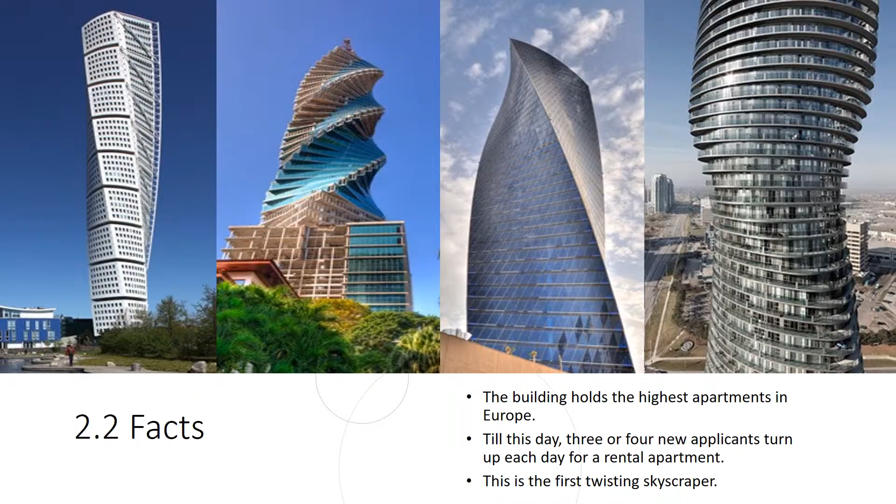The building is located in the western harbor of Malmö, beside the Ribersborg beach, just across the connecting bridge between Sweden and Denmark. On a clear day, the building would be visible from Copenhagen in Denmark, in the distance across the Øresund.

This inspirational project has received several prestigious awards. In 2015, it received the 10-Year Award from the Council on Tall Buildings and Urban Habitat. Moreover, the FIB 2006 Award for Outstanding Concrete Structures and the MIPIM Award, and much more.

Section number 3 is the building description. This section will cover some general information, the design and concept of the building, the material used for the construction, the facade of the building, the finishing material used in the torso, and the cost of such a mega project.

These are some general information about the building. The owner and developer is HSB, which is an association for housing in Sweden. The architect and structural engineer is the company of Santiago Calatrava, Architects and Engineers. The electromechanical engineer is the Sustainable Engineering and Design Company. The main contractor of the project is NCC, one of Sweden's top contractors. The interior designer is Samark Architecture and Design.

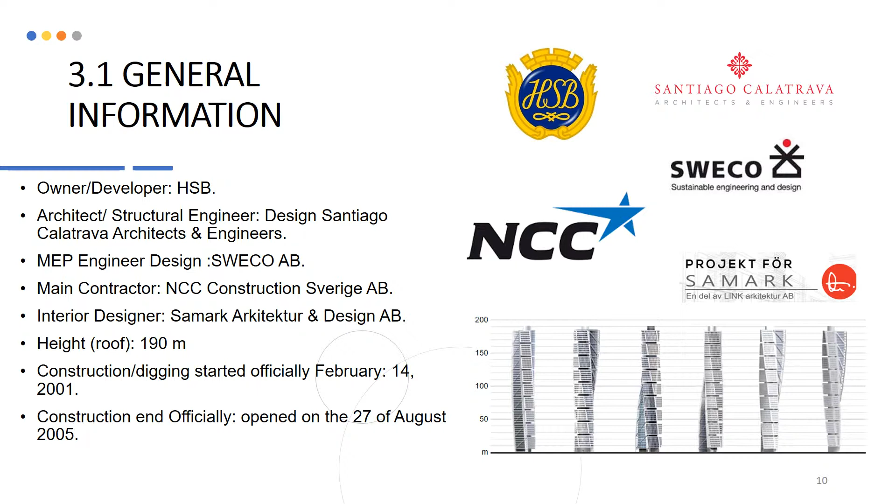The designer and mastermind behind this masterpiece is Santiago Calatrava. He is one of the most fascinating architects of our time, responsible for a number of fascinating projects all over the world, such as the City of Arts and Sciences in Valencia, the World Trade Center Transportation Hub in New York City, and the Olympic Sports Complex in Athens.

The building's Spanish architect Santiago Calatrava was inspired by a white marble sculpture called Twisting Torso that explores the human body in motion, as it can twist as far as it can while staying directly upright. This sculpture is in fact his own piece of art.

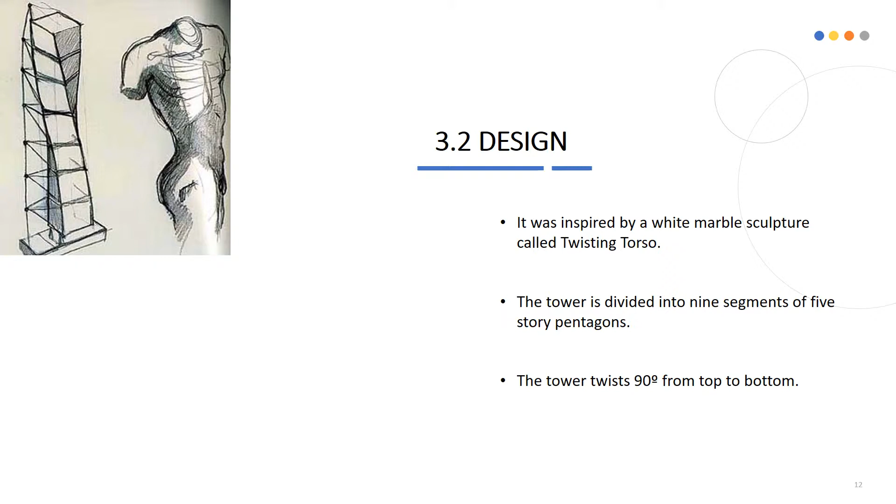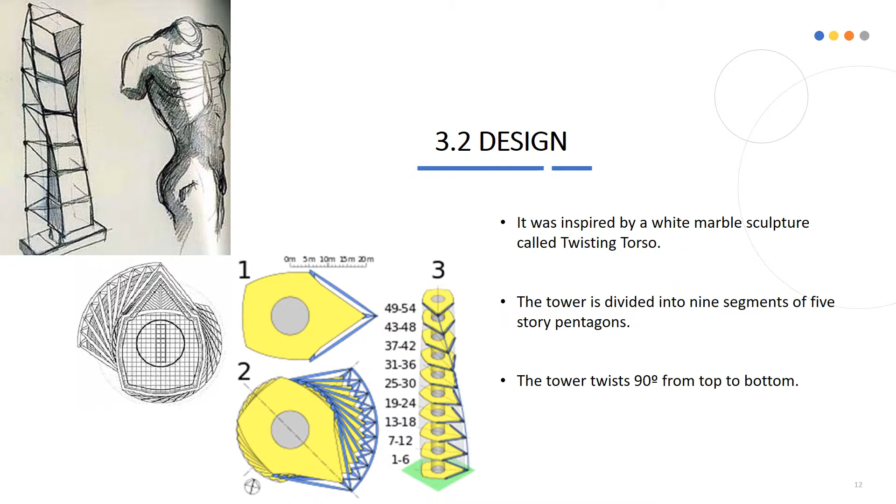The tower is divided into 9 segments of 5-story pentagons that are stacked one above the other, with one floor recessed between every two adjacent cubes. The topmost segment has an angle of 90 degrees clockwise compared to the ground floor. In other words, the tower twists 90 degrees from top to bottom, and that's why it was named the Turning Torso. The building is situated in the middle of a black granite reflecting pool with two sculptures also designed by Calatrava.

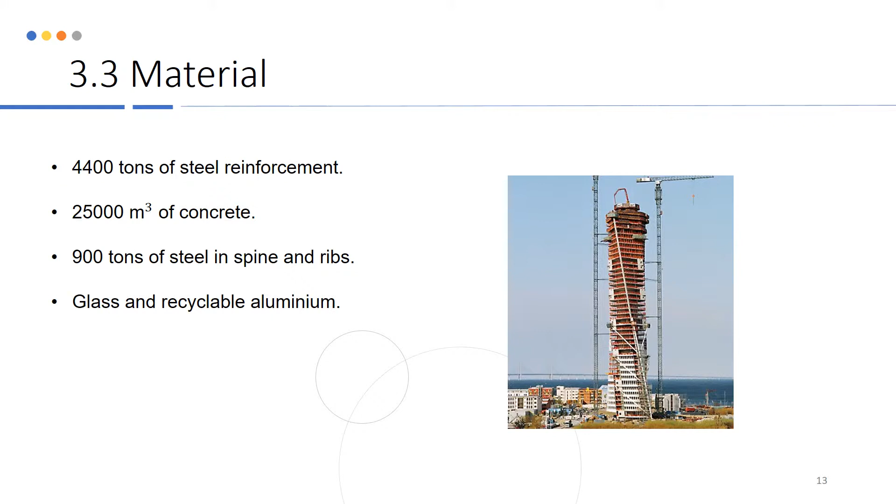During construction, 4,400 tons of steel reinforcement were used. Moreover, 25,000 cubic meters of concrete, 900 metric tons of steel in the spine and ribs, and glass and recyclable aluminum for the facade. Now I'm going to talk about the facade of the project.

The total facade area is 2,000 square meters. Its color is white, chosen to give it a noticeable and stunning appearance from far away. The facade system is a curtain wall made out of 2,800 curved panels and 2,250 flat windows in total. The facade uses curved aluminum panels with windows at an angle between 0 and 7 degrees, either inwards on the western facade or outwards on the eastern facade, in order to follow the twist of the building.

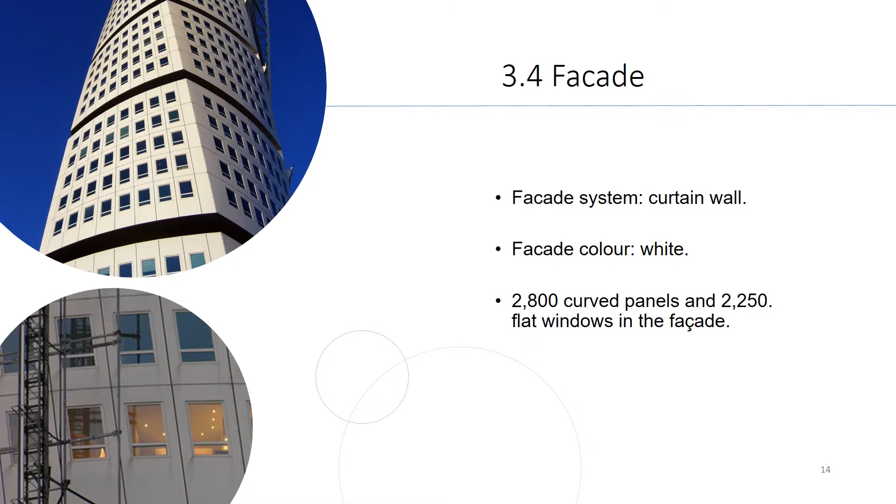Not everybody knows that there are quite a few windows broken every year. When the torso sways, it stresses the glass in the windows, and some of them can't handle the movement, so they crack and get broken.

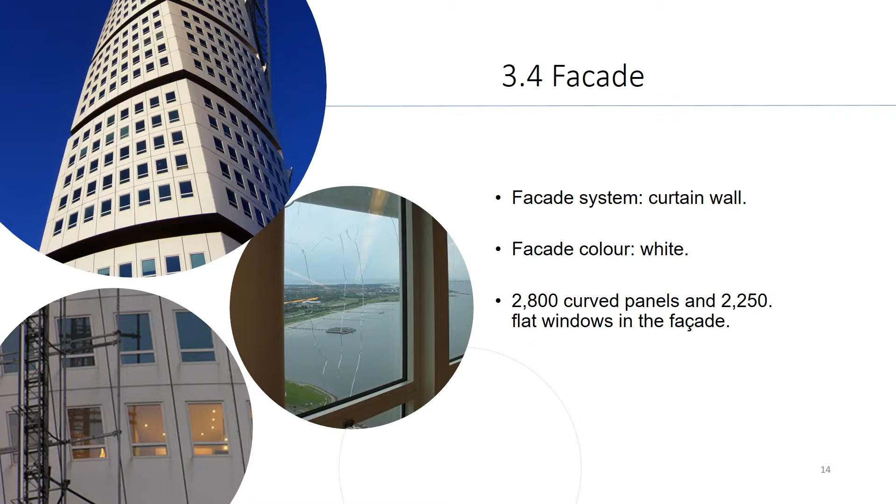The torso is furnished to a high and modern specification. Entrance halls feature polished limestone floors, and the same stone is also used on window sills.

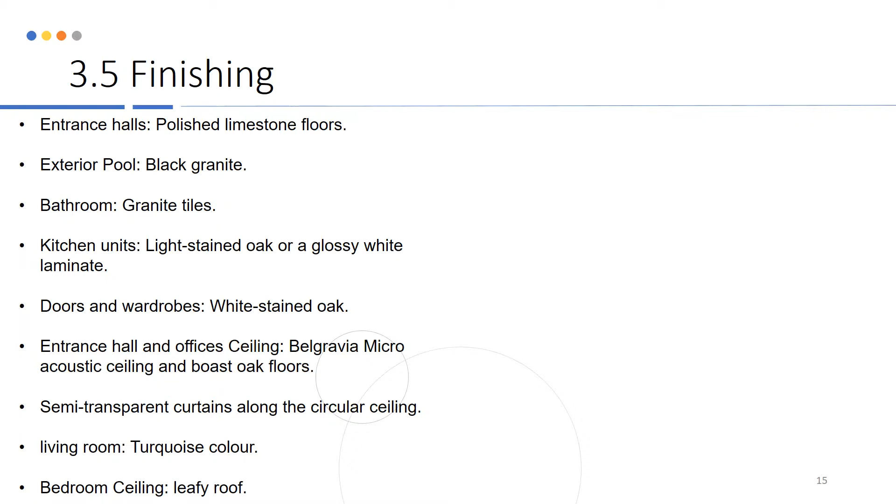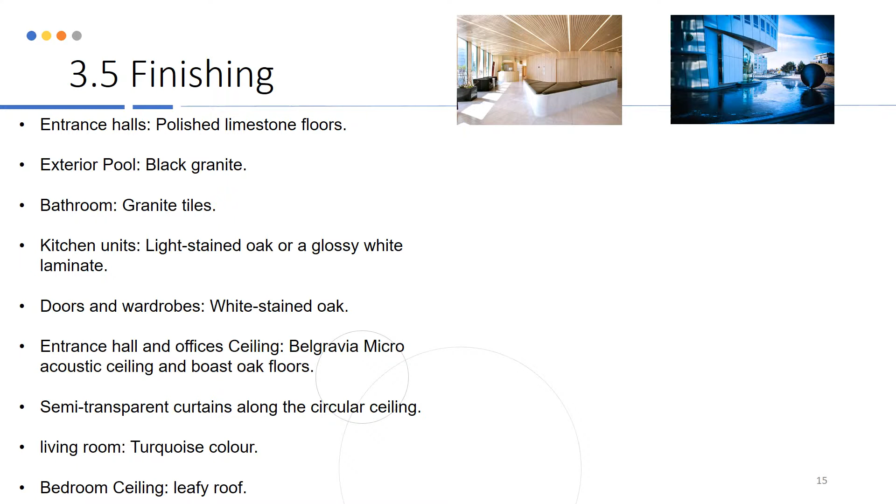The exterior of the Turning Torso features a black granite reflecting pool and a granite entrance path. Granite is also used in some places within the building, notably in the lobby. Tiled bathrooms are fitted with granite surfaces and underfloor heating.

The kitchen units are specially designed from light stained oak or glossy white laminate to accompany the kitchen appliances, such as the white washing machines. The apartment doors and wardrobes are made of white stained oak as well.

Customized corridor micro-acoustic ceilings are installed for the spiral-shaped corridors leading from the entrance hall to the car park, as well as the offices in the building. Every single ceiling tile used in the corridor was custom made in order to follow the curving movement of the corridor.

Semi-transparent curtains along the circular ceiling serve to create a room within a room. The carpet used also takes up the circular form.

A turquoise color with shimmer effect has been chosen for the walls of the living room. The ceiling of the bedroom is a leafy roof in silver that gives a metallic effect.

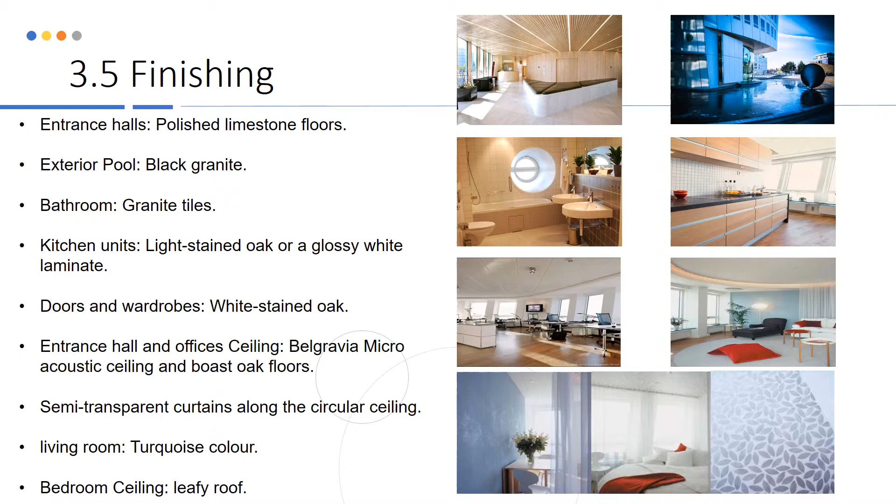The architect Santiago Calatrava made a mistake and calculated the wrong amount of reinforcing iron to use. 44,000 tons of reinforcing iron were used instead of what was planned, 1,850 tons. This means a huge increase in the total cost, and caused the construction time to increase by one full year.

The outside steel frame also had its cost increase due to a conflict with the supplier. The total cost was increased from the planned 80.5 million US dollars to an actual total of 286.5 million dollars, as the building turned out to be more complicated than planned.

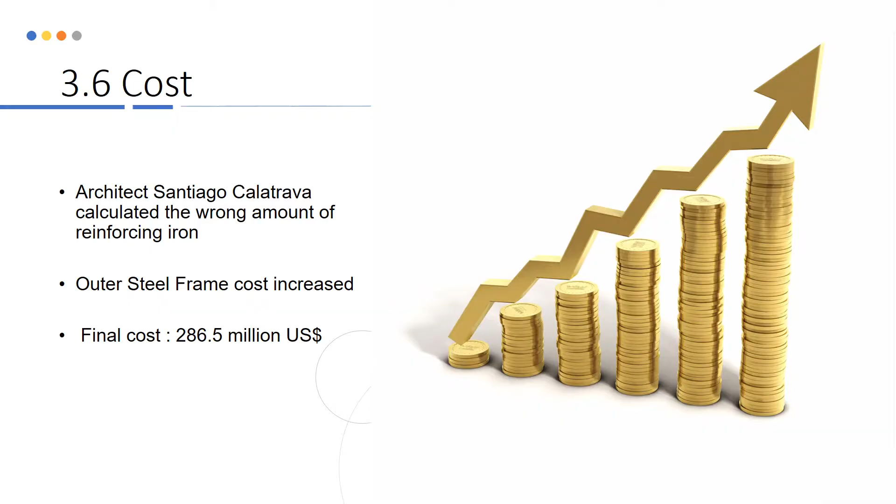Section number 4 covers the structure analysis of the building, as well as the foundation of the torso and the superstructure.

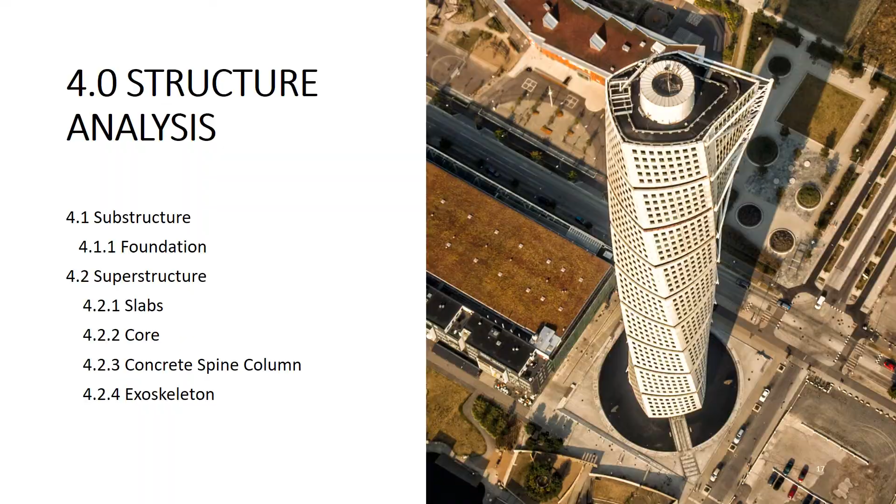The central core is supported by a foundation slab that is 30 meters in diameter and 7 meters in thickness, which was poured in 3 continuous days.

The tower rests on piles driven into a foundation that sits directly on the limestone bedrock. The piles were driven 15 meters into the ground and a further 2 meters into the limestone bedrock by an enormous vibrating sheeting machine. This type of foundation slab was used to support the building and avoid any unexpected bending or swaying.

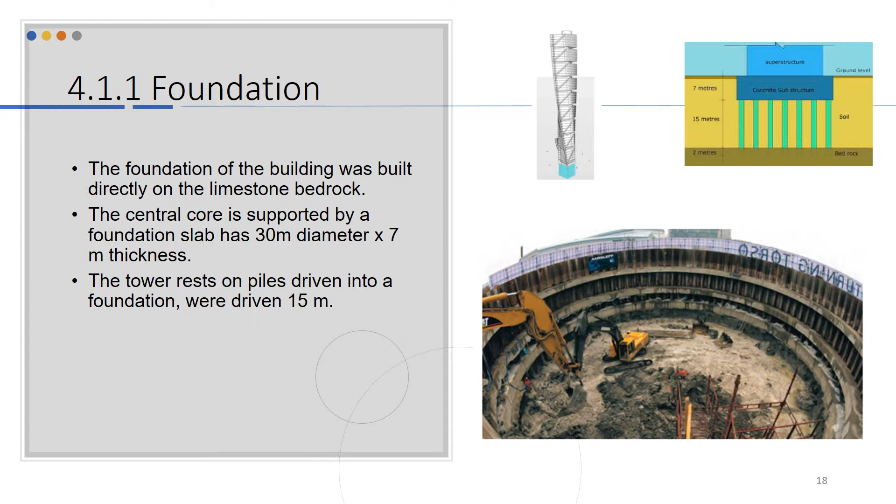Now I'm going to talk about the superstructure. First, the structural slab: slab forms are fitted around the core. The forms of the structural slab are triangular in shape and fitted together like a slice of pie to form an entire floor.

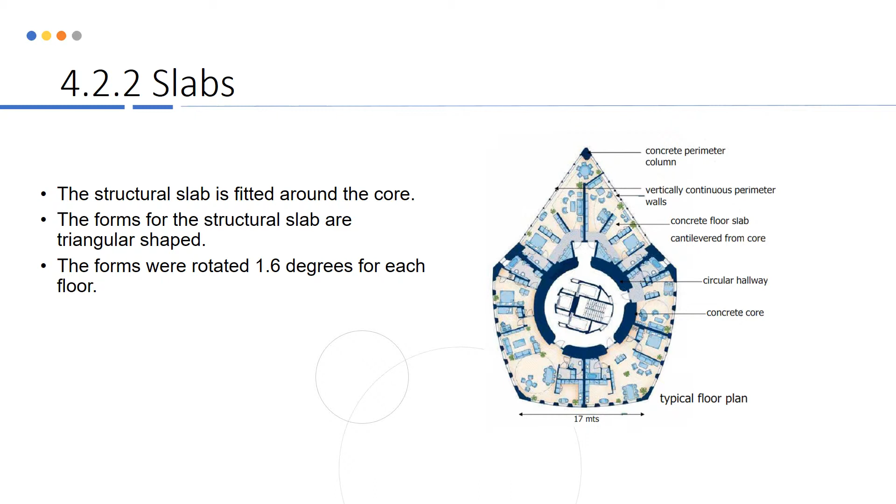The corner of each floor is a concrete column supported by a pile foundation. The forms of each floor rotate 1.6 degrees in order to create the characteristic twist of the building.

The concrete core is the main load-bearing structure of the building, with an inner diameter of 10.6 meters and walls 2.5 meters thick on the ground floor, decreasing gradually until it reaches 0.4 meters at the highest level. The core is shaped like a concrete pipe.

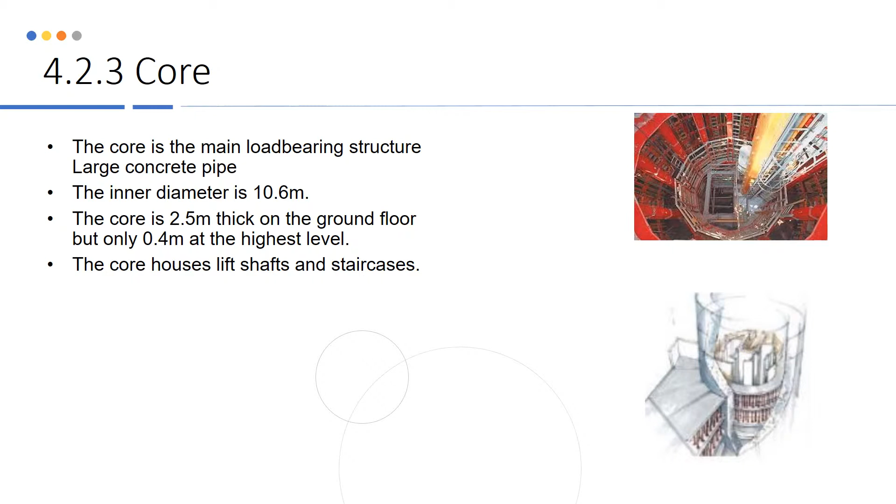The core houses the lift shafts and staircases inside of it. A circular hallway rings around the central core to provide a walkway from the lifts to each flat.

The concrete spine twists up the torso, part of the support structure that protects the 9 cubes from wind loads. The concrete spine is constructed floor by floor; every section must fit exactly with the one below it, and it's tilted slightly at a precise angle.

This picture shows the main superstructure elements of the Turning Torso.

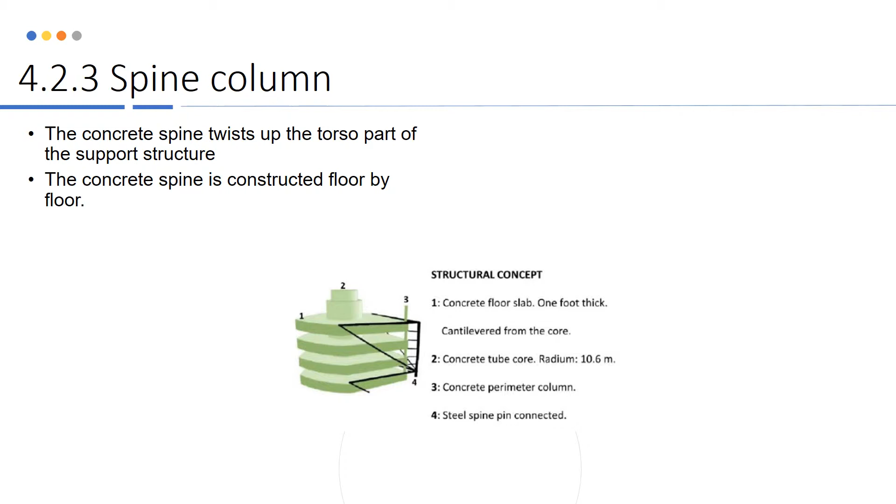The torso's exoskeleton wraps around the torso, which is effectively a white steel truss erected on the outside of the building with the same clockwise rotation as the tower itself. It is critical for the torso's support.

The exoskeleton consists of a spine column at the corner of each floor, with diameter up to 90 cm, fixed to the tower between each module, mainly with horizontal and diagonal tubes.

These tubes reach back to 4.5-ton steel anchorages embedded in shear walls at the building's back corners. The steel support transfers shear forces to the supporting concrete core.

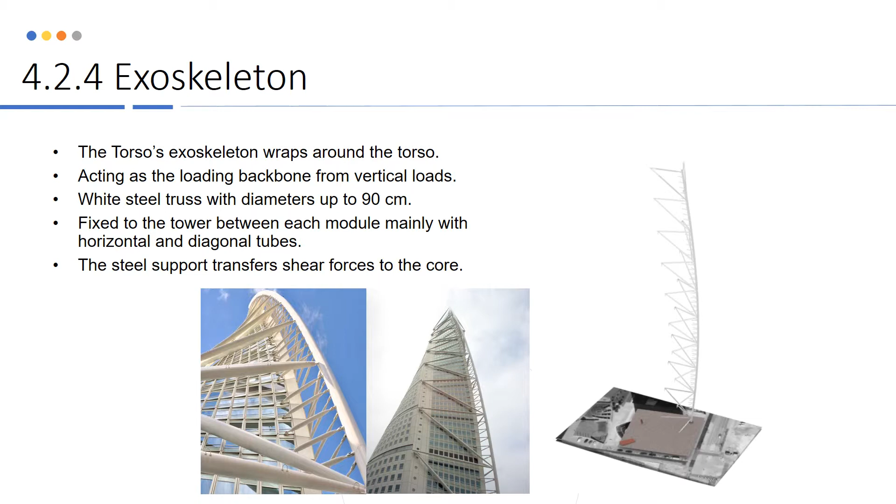As you can see from this picture, this is how the load is transferred. At picture number 1, the load transfers from the exoskeleton to the horizontal and diagonal supports, to the core, and then to the foundation.

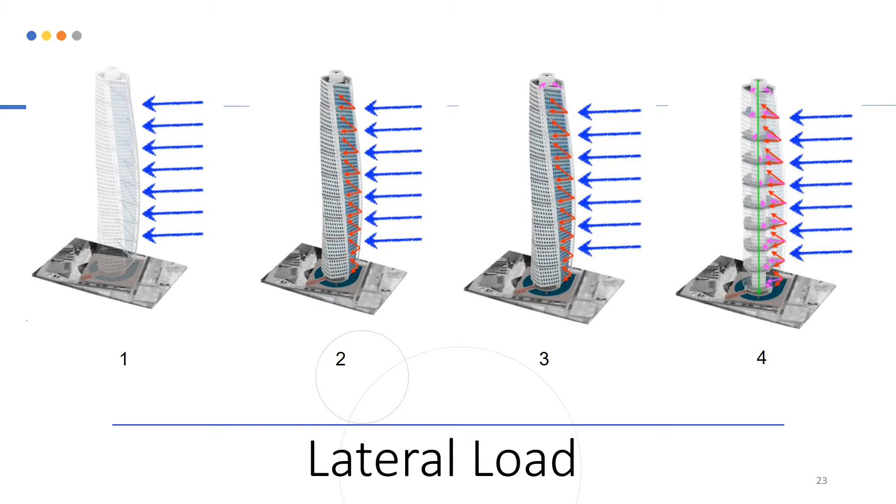Now I'm going to talk about the construction process and how it was done exactly.

During construction, the crew had to work 80 hours a week to stay on schedule and budget, as lots of days were lost due to extreme weather conditions. Wind speed was 72 km per hour, with temperatures below freezing on the top floors. The plan was to construct one floor per week.

The construction couldn't be done without the automatic climbing structure. This structure shapes the building floor by floor and is the muscle that made everything possible. It was anchored on 12 fixing points, with a concrete boom installed on its own climbing scaffold using 4 fixing points in the core. A Putzmeister device on the ground floor pumps concrete to the higher levels at a rate of 1 ton per second.

The outer floors are built using a temporary platform called the table floor. The table forms are tied to the concrete core, and the legs are screwed tight to the floor below to fix it in place. All the table form sections are connected together to provide a base for the rebars and concrete.

After the concrete dries, the automatic climbing structure moves to the upper floor. Before the table slabs are moved to be used on the next floor, they are inspected on the ground floor. This process may sound simple, but in such a massive project, it was very challenging.

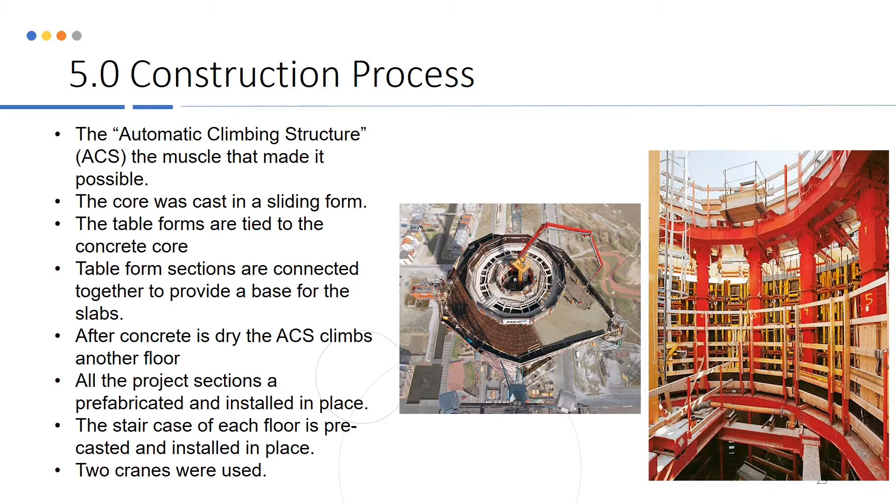All the project sections were prefabricated and installed in place. The reinforcing iron bars are made ready on the ground in a building nearby. The staircases of each floor are also precast and installed in place, working from the top opening down to the bottom. 2 cranes were used to move the table forms for maintenance and construction.

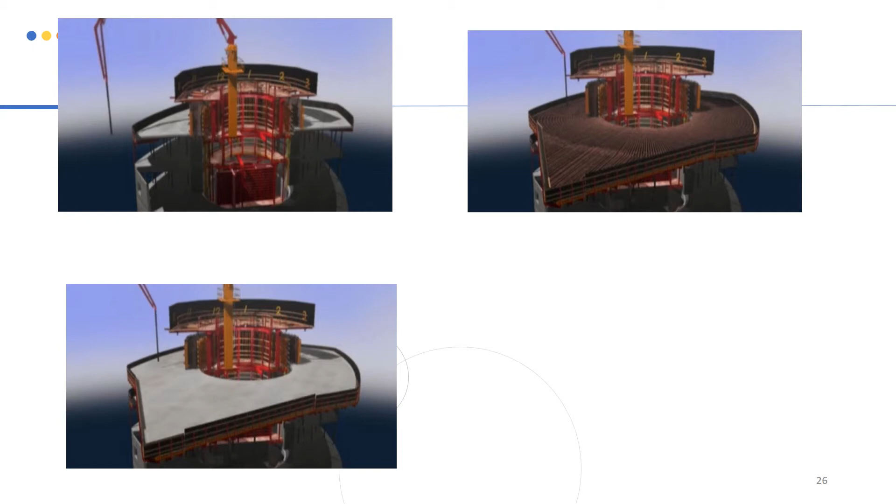The construction process was done as follows: first, the table forms are added, and when completed, the rebars are installed in place. Then the concrete is poured. After pouring and drying, the automatic climbing structure climbs to the next floor to continue the same process. Floor by floor, this is done until the whole building was constructed.

The final section of the presentation is the function of the building. This section covers the uses of the building, the services it provides, its sustainability, and finally safety. The main usage of the torso is for rental apartments and conference offices.

It houses top quality apartments, offices, and conference rooms. It consists of 147 rental apartments on floors 14 to 50, ranging from one-bedroom 45 square meter units to 190 square meter units. Not all apartments are equal in dimension because the floor space changes due to the size of the core walls, so the ground floor has 370 square meters of usable space while the top floor has 430 square meters.

All apartments have unique layouts depending on their position in the building. The living rooms are large and open, often with views in two directions. On the seventh floor there's a room for celebrations that can take up to 50 guests for dinners. There's a gym, sauna, and jacuzzi on the 43rd floor. Each apartment has its own space in the wine cellar, and close by there's a cozy little room for wine tasting. The 53rd and 54th floors, with a magnificent 360-degree view, have conference halls.

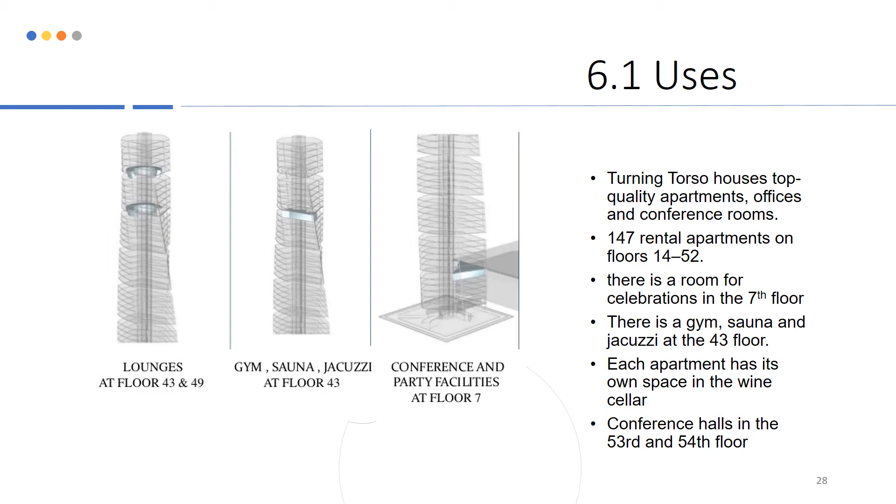The torso offers a wide range of services. There are 5 high-speed lifts in the core of the building, traveling at 5 meters per second, taking only 58 seconds to go from ground level to the 54th floor. 3 of those lifts serve the residential apartments, while 2 serve the commercial areas. A separate parking block for residential and business tenants can be accessed by a private tunnel. The heating system is powered by a utility Sydkrafts system, with 100% locally renewable sources. The 2 lower cubes of the torso contain offices and conference rooms with separate heating, cooling, and IT systems. There's no extra charge for window cleaning, as it's included in the rent.

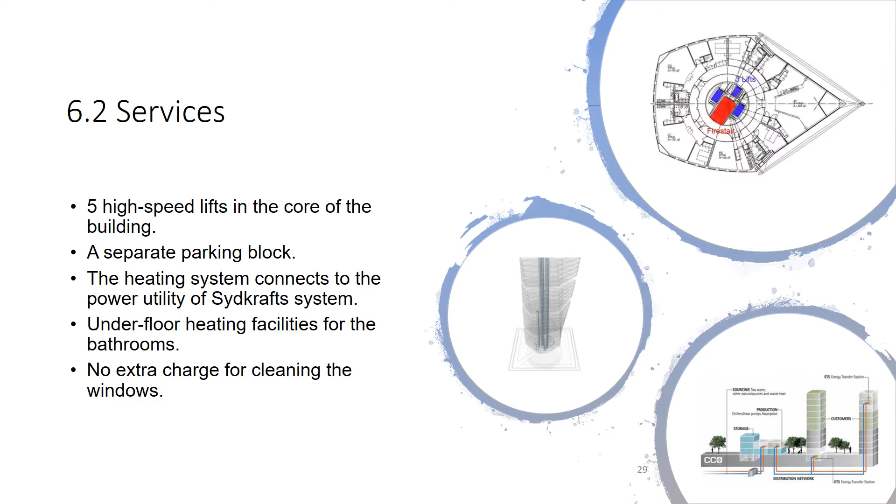Sweden has perhaps the most far-reaching environmental legislation in Europe. 100% of the energy consumed in the building, supplying the tower's electricity and heating, has zero emissions. This is obtained from a variety of sources, including wind power, biogas, and solar.

The torso also tries to make it easier for residents to be environmentally friendly. Residents can make informed decisions regarding their energy consumption with electricity consumption meters installed in each unit, allowing them to control their own energy costs and thereby their impact on the environment.

The torso also plays its part with organic waste. In the kitchen, there's a waste disposal unit in every apartment for grinding organic waste, which is transported to the Malmo biogas plant where it produces biogas. Non-recyclable waste is collected in a garbage chute at the basement. The whole building, including the exterior skin, is lit artificially by golden dragon LED lighting, which is environmentally friendly.

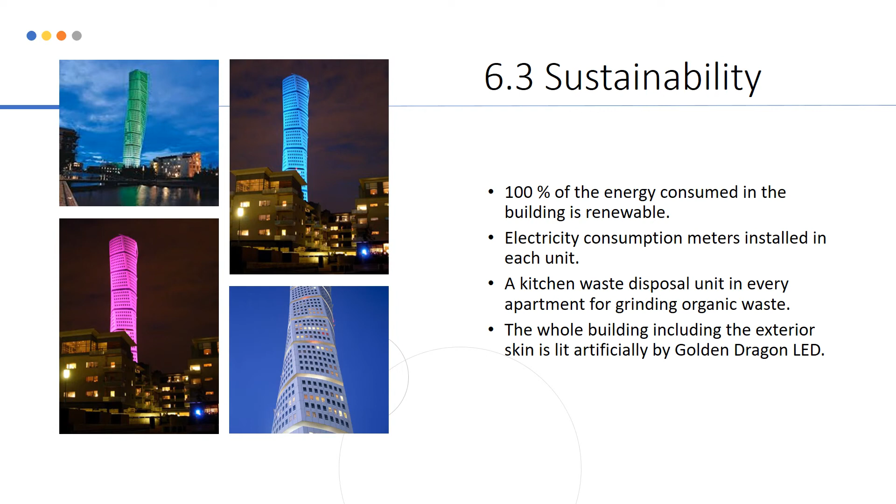The Turning Torso consists of top safety measures. All security systems have independent reserve power supplies and emergency lighting. One of the lifts has its own emergency electricity supply for use by safety personnel during evacuation. Sprinklers, fire alarms, smoke detectors, and fire gas ventilation are installed in every room. The water supply of the sprinkler system is a double water supply system with its own emergency electricity supply.

Each floor in the apartment has its own fire stair with a fire rating of 2 hours. Literally speaking, the torso consists of 9 buildings stacked on top of each other. All the rooms have secure windows that are impossible to open for security measures. Cameras for surveillance are everywhere, monitoring different parts of the building to ensure security all over.